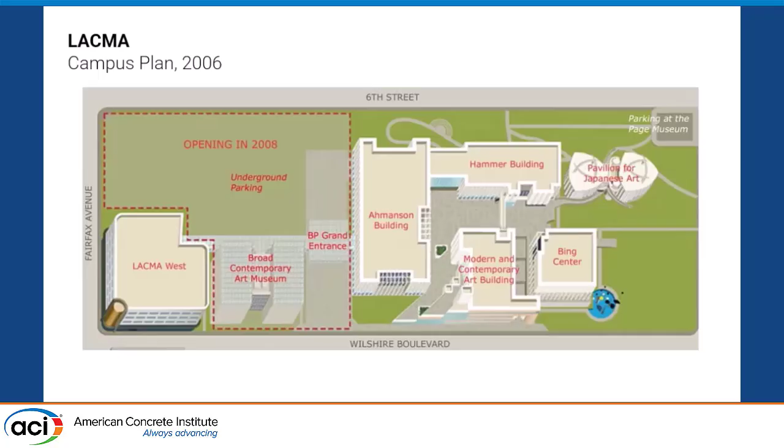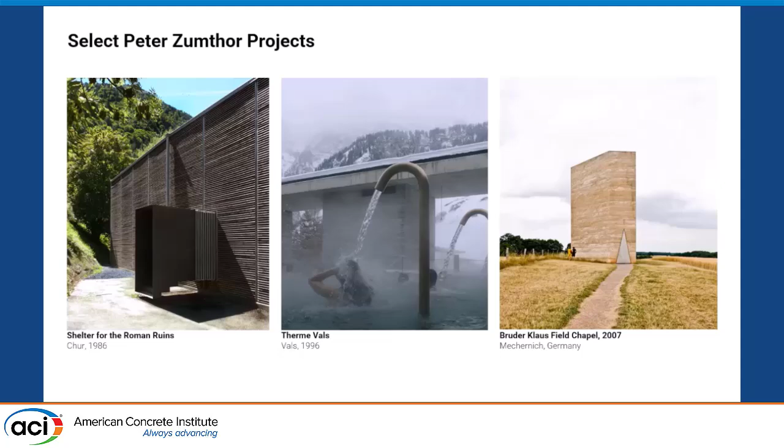The museum board went through a number of iterations with competitions to find the right architect for this building, and eventually landed on Peter Zumthor from Switzerland. He's a very known and respected architect, and a lot of his work is very atmospheric. He's interested in monolithic forms, concrete forms and materials. This project, LACMA, would be his first and largest project in the US.

This is a quite early model, and this is a physical model. Everything here is real—you can touch it with your hand, all the trees are actually physically modeled—and this sits in his studio in Switzerland.

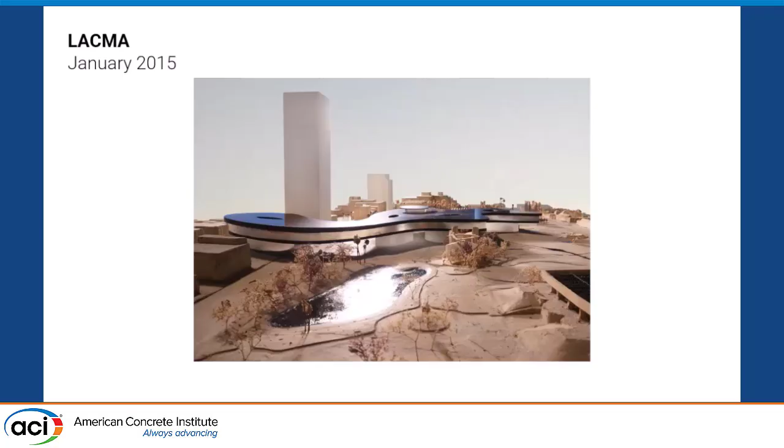You can see also from very early on, this concept of the organic shape was a very central theme. If you've been to LACMA, you know there's a tar pit next to the site—that's where ancient mammoth bones and stuff are found. I think part of the inspiration for the new LACMA was this very organic form; it stems from this tar pit. So there's a strong relationship between the building and the site.

Another important design concept for this museum is that all of the galleries are on one single plane. If you go to a lot of museums, you have galleries on several different floors—floor 2 for European art, floor 4 for Asian art. The idea for this museum is that all of these galleries are on the same plane, so there's an equal access that everyone has to these different types of art.

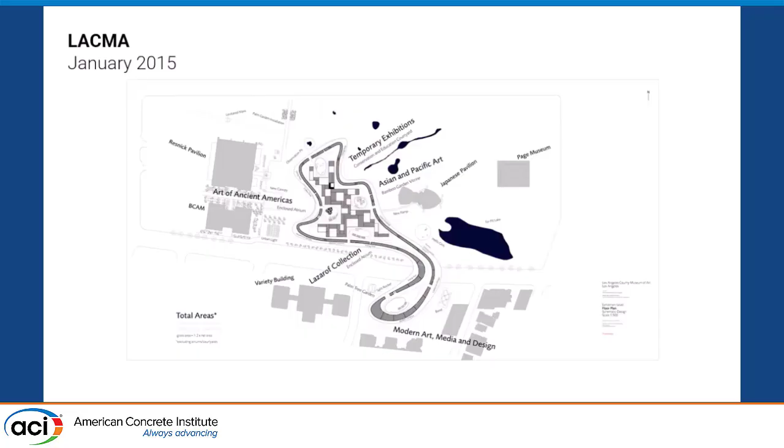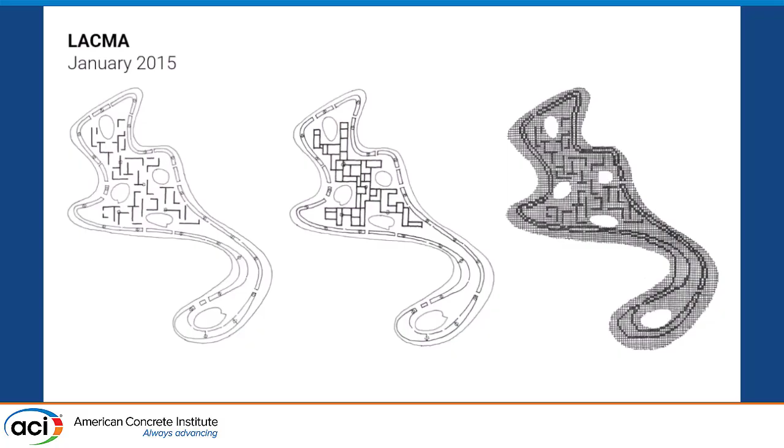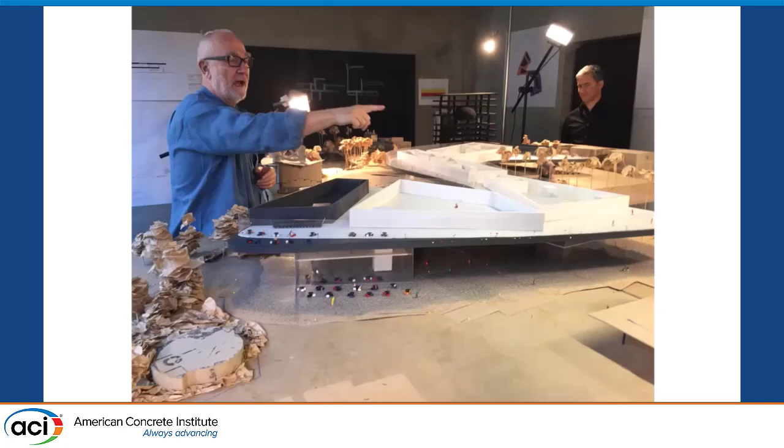This led to a very flat, large structure that, technically speaking, is only a 1-story building because there's only one floor that is the main exhibition floor. Some more diagrams show the interaction between the different gallery spaces, and the hierarchy is already starting to form along with the pathway between the different galleries. Another shot of Peter Zumthor in his studio, working through the physical models to imagine the space.

In 2016 we went through the initial phase of design development. This shows the concept—it's a bit different in a few slides—but the main concept forming was that there are these clusters of galleries.

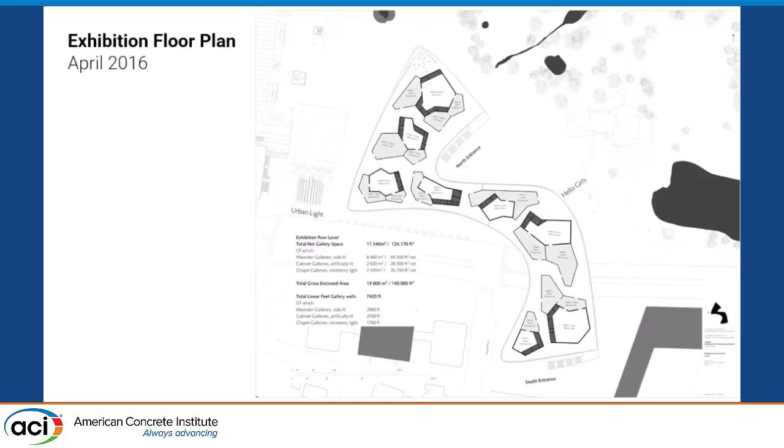So the white boxes are towers that go from the ground up, and then there are interconnecting galleries, the gray boxes that branch off from the towers but don't go to the ground. So there are floating galleries being suspended off of the ground.

So the exhibition and roof level are formed by top and bottom slabs. They end up being 8-inch slabs, with vertical ribs forming a waffle pattern hidden between the two slabs, ribs that are 4.5 to 9 feet tall. Those interstitial spaces between the slabs become your mechanical plenum and maintenance access spaces.

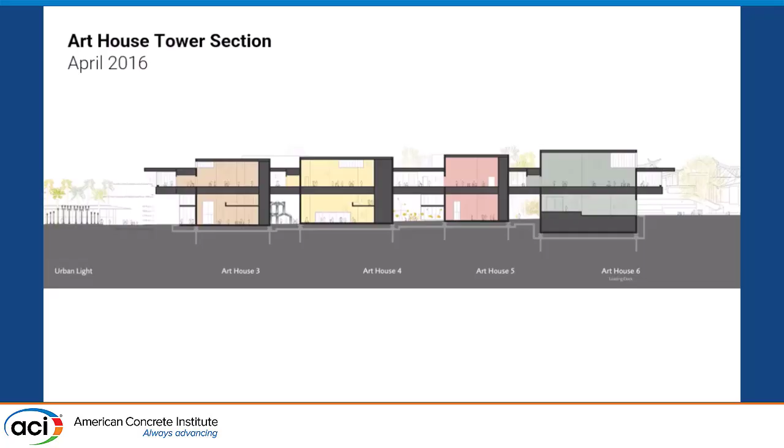Some early concepts: Peter Zumthor had really liked this organic flowing, meandering gallery idea, so we tried to take his idea and rationalize it based on real-world patterns you see. But we still ran into challenges of how do you make this actually constructible and repeatable.

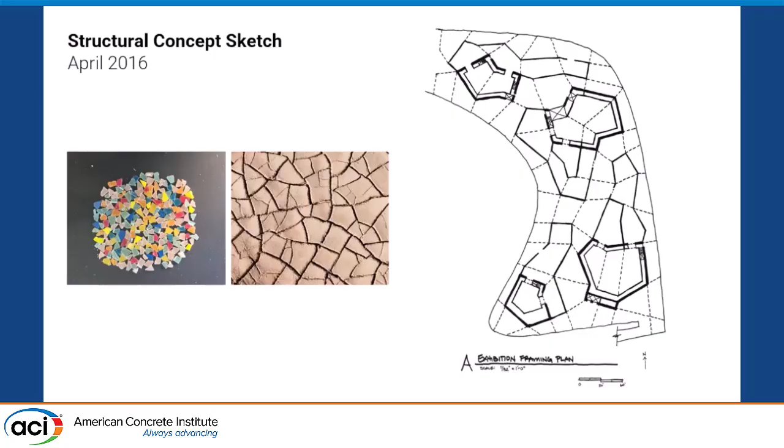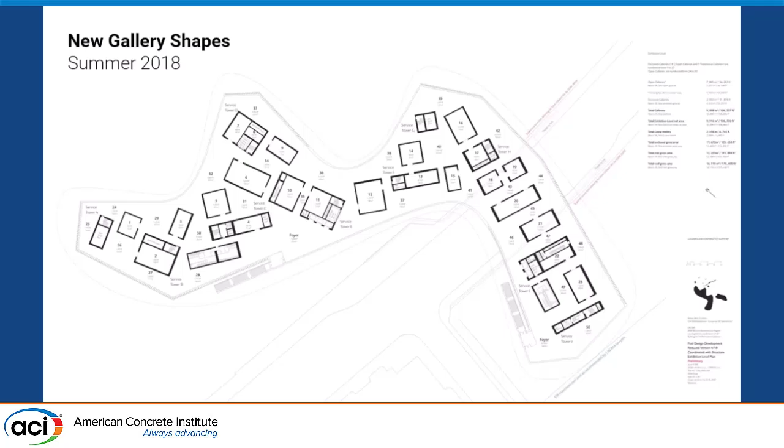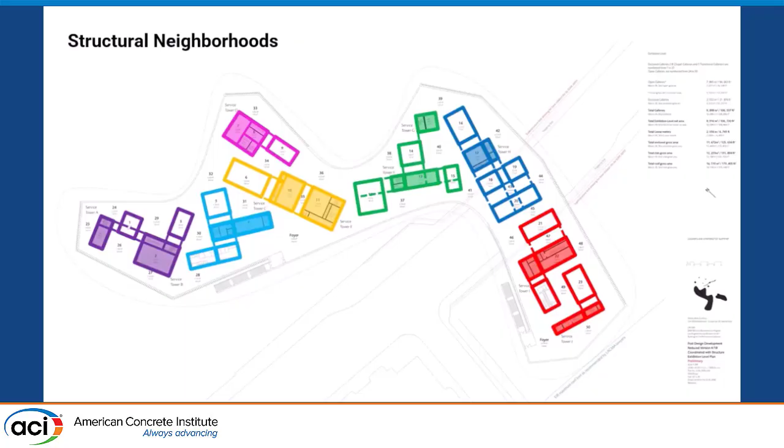So a few years later we went back to DD and developed a more rationalized layout of the plan. You can see the pairing I was talking about earlier: the towers that go all the way to the ground are the solid colors, and the galleries that hang from it are on the side, and in section that's what it would look like.

So the main thing that made this possible is to use PT. We have PT, I'll show you more about the hierarchy of the PT systems in the building, but one main concept we had very early on is to have PT tendons that link these floating galleries back to the towers.

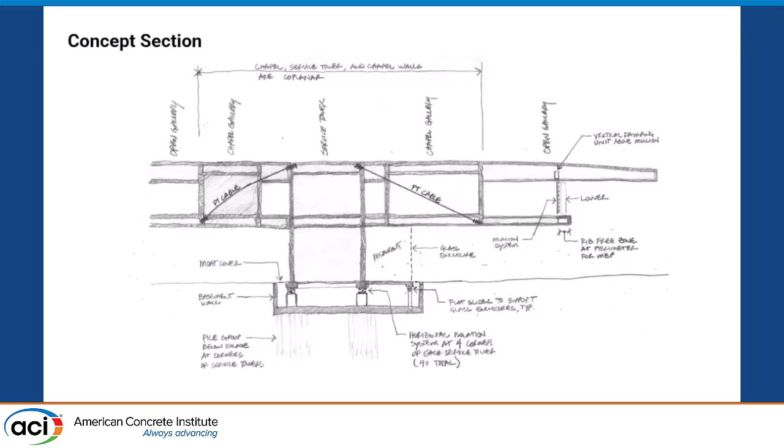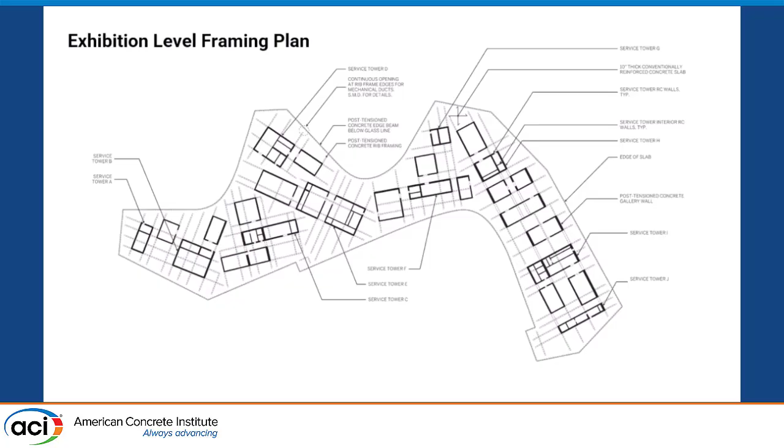This is showing us stepping through the rationalization. So even now we have an orthogonal grid, but they don't really relate to each other, and we wanted to come up with a consistent plan for the structure. So we tried to impose a rectangular grid. Didn't seem like it—we were trying to fit a square peg into a round hole situation.

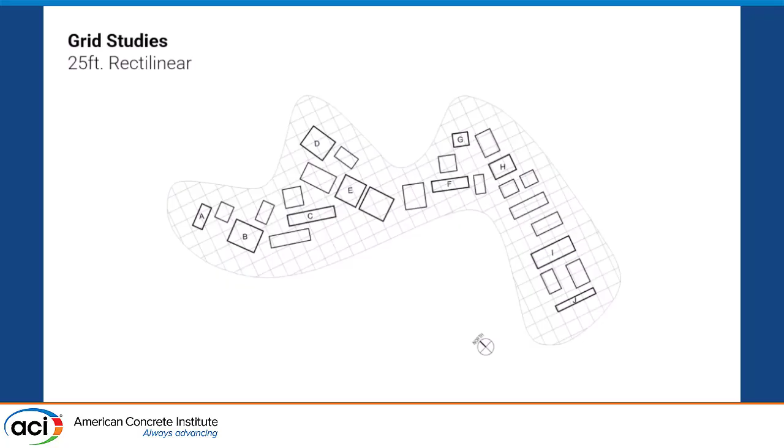So we thought, why don't we do a rhombus grid? Who says that things need to be orthogonal? Why don't we do 60-degree angles? This gave us the opportunity to use, instead of just 2 directions, 3 directions, maybe even a 4th one you can see on this side.

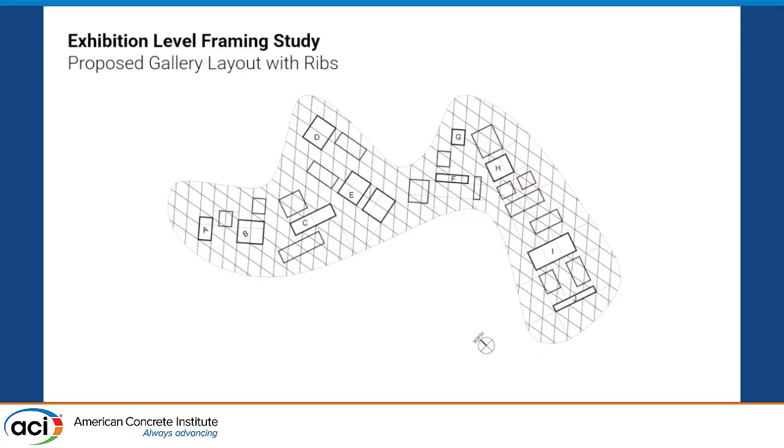So that gave us a good starting point for the structure and for the architecture. One thing I hadn't mentioned yet is that in this building, the structure is the architecture. Aside from a topping slab and the glass that wraps around the building, there are no other architectural finishes—no partition walls, no architectural ceiling. The structure is the architecture.

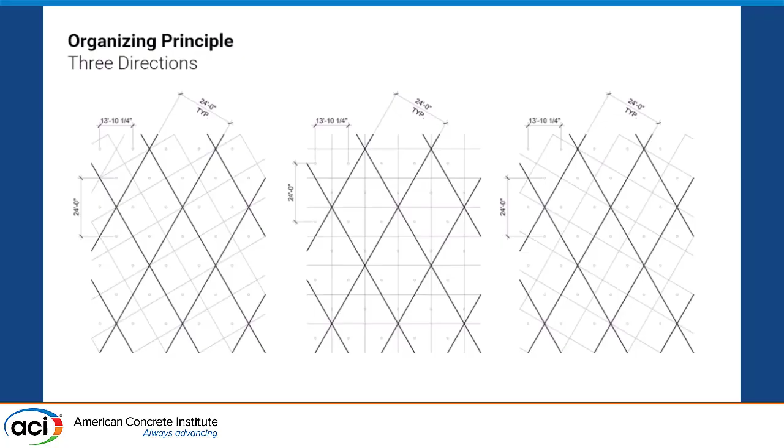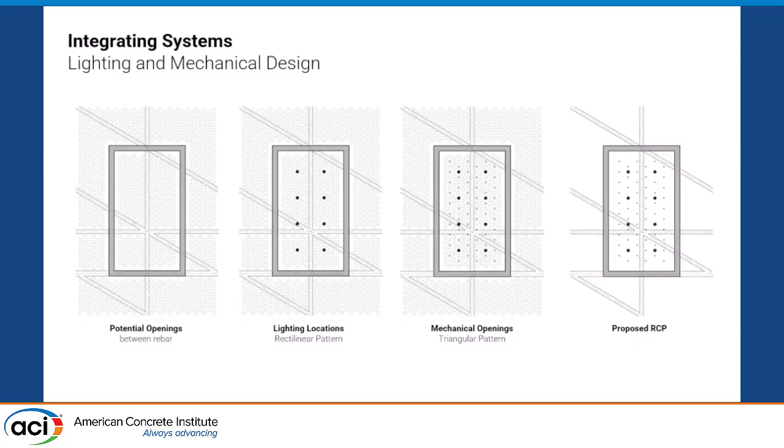So from very early on we had to work with our architects and our MEP engineers to lay out the systems in the project, figure out where the holes are that the lights will come through, where the holes are where return and supply air would feed the system, and lay that out onto our grid.

Additionally, we thought it would be really nice to express the rhomboidal grid, or the triangular grid. So we actually had special formwork that was triangle shaped, so that when you remove the formwork you can see the lines that reflect the grids.

The post-tensioning system—let's talk through the hierarchy of the PT. There's PT in the walls that go diagonally through. We also have PT in the vertical ribs, which are allowed to sweep up and down within the slab sandwiches. And then we also have PT in the top slabs to give that additional PT eccentricity.

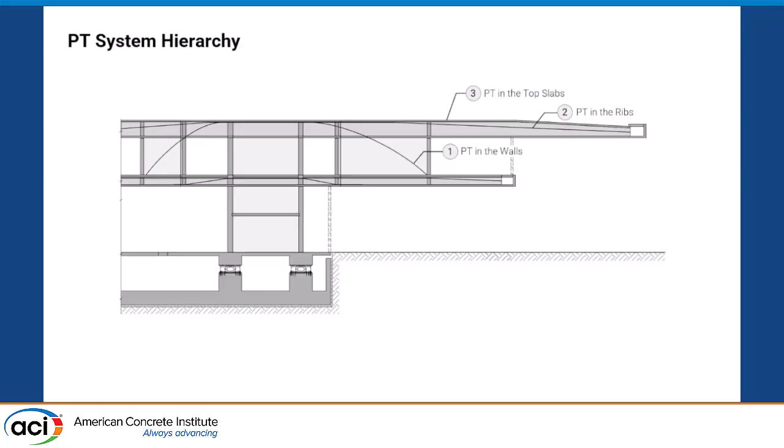Just to give you an idea of the plans, this is our PT—it follows the grid directions in both directions. When the PT is in the slab, you can't sweep it or change the eccentricity very much. So what we did was have PT that stresses from one side overlapping with PT that stresses from the other side, so that when they overlap in the middle, you get double the amount of PT. We're trying to control the amount of pre-compression by overlapping tendons and burying dead ends in the slabs.

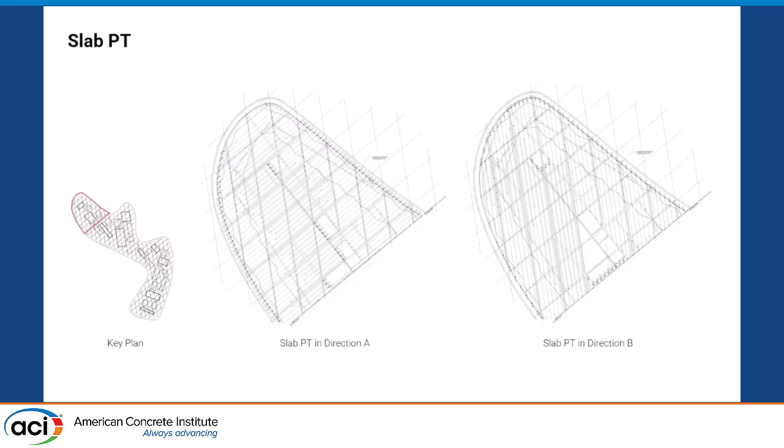In the rib design, here you can see an elevation across about 5 grid lines. There's not too much sweeping up and down here, but some of our grid lines are 15 bays long, and the PT starts diving all the way up and down the 9-foot rib.

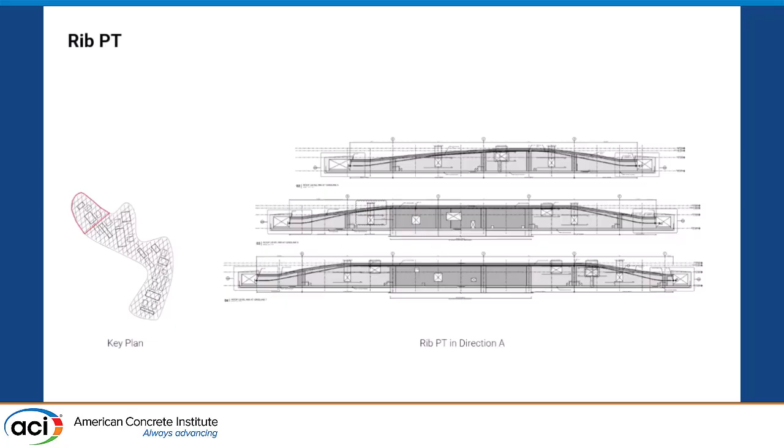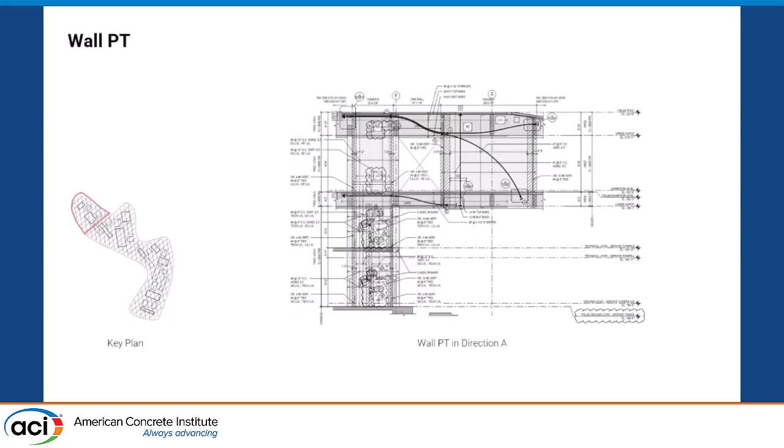In the walls, we have the diagonal PT coming down, because these walls are hanging and supporting the floor below. Without the PT, they would experience too much tension, so the PT really helped us with that aspect.

For modeling, we tested a bunch of software, did sensitivity analysis, and ended up with LUSAS—the London University Structural Analysis software. We really liked working with this software because it was able to handle our model, and we were able to model the PT just about anywhere we wanted it. There was no constraint like the PT must be tied to a certain floor or anything like that. So we really liked the freedom of the software.

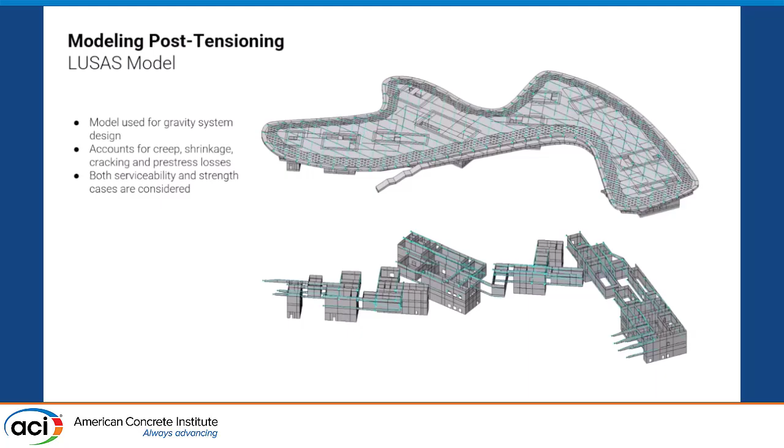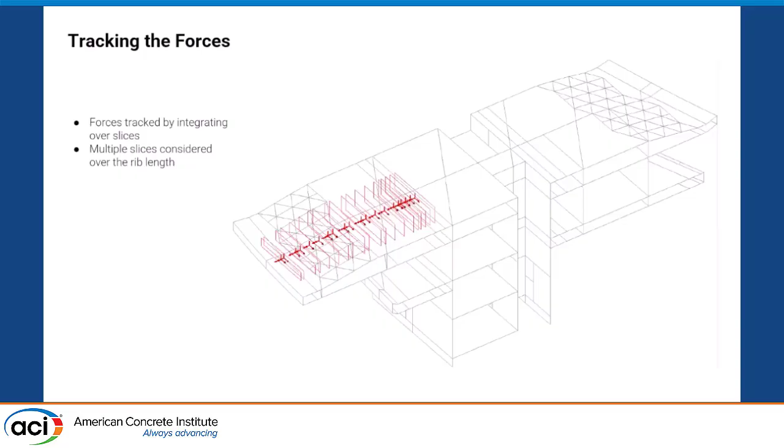We were also able to use it to account for creep, shrinkage, look at cracking, and all the PT losses from various codes—we checked AASHTO, Eurocode, and CEB, doing sensitivity analysis using these models to come up with our final methodology. We were able to slice the building along our grid lines to integrate forces and do strength checks, and of course we did deflection analysis—just some example contours here. There's much more math behind it, I promise.

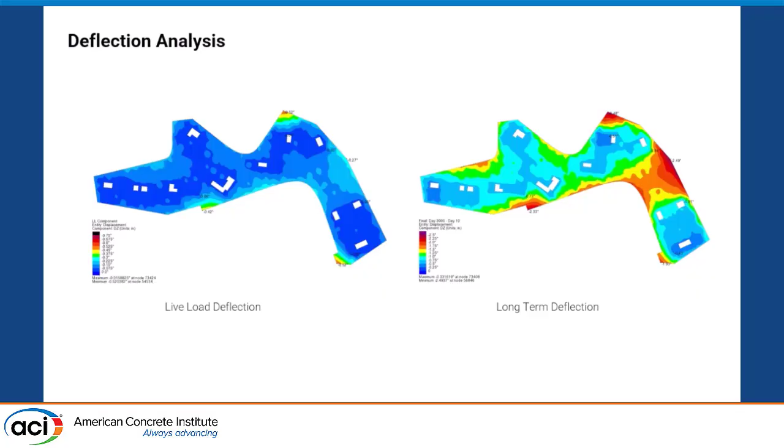We looked at live load deflection and long-term deflection. Long-term deflection was very important because, as I mentioned, there's glass that wraps all the way around the building, and this glass has very tight tolerances. We were looking at a quarter inch over 10 feet of slope in the long term. Also, the top and bottom—the roof sandwich and the exhibition sandwich—move independently, because with different span lengths and different loading, those two would move differentially. So we had to ensure we were working within a certain range of long-term relative deflection that the glass mullions can handle. We worked very closely with our facade engineers and contractor to make sure there were no issues there.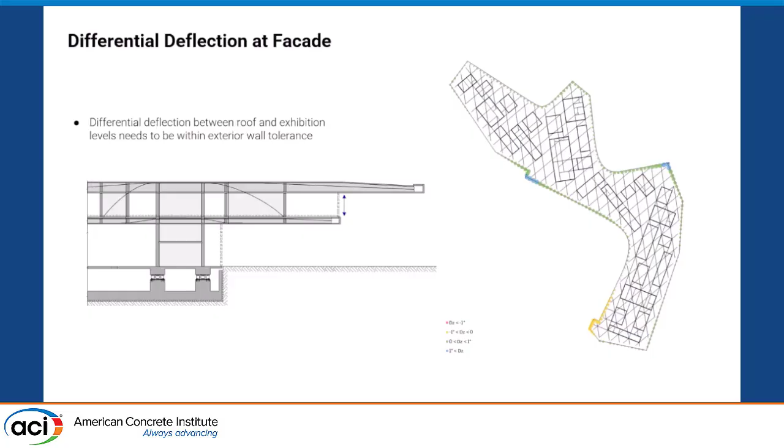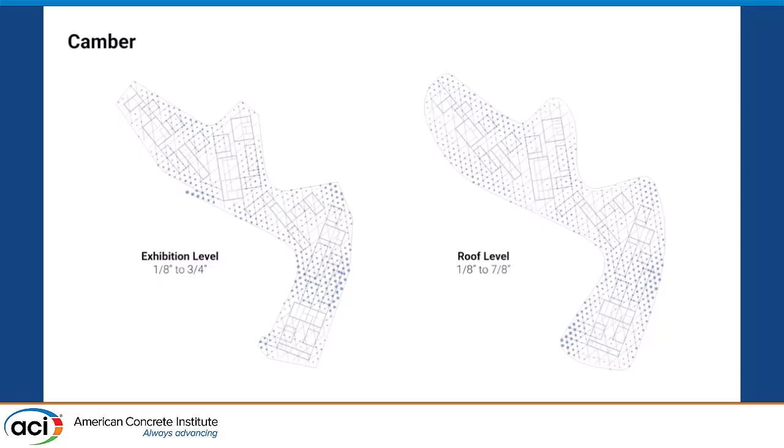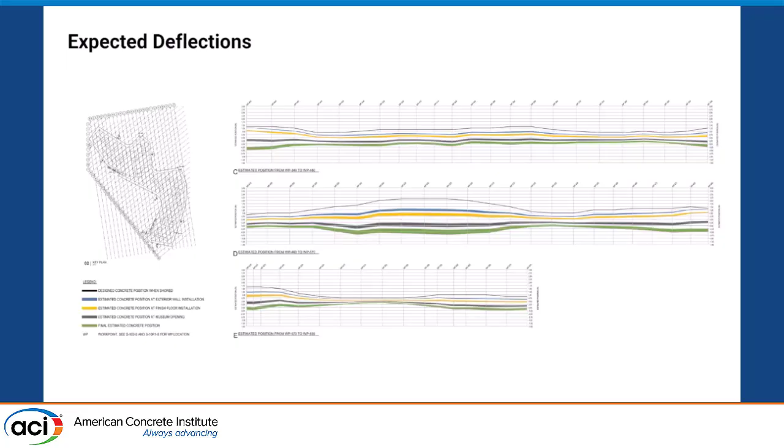We had camber diagrams with very detailed camber points across the building. Something we don't usually do, but figured was very important for this project, is that in our drawings we actually issued our expected deflections and expected position of the concrete at each stage of construction. At the top you have the camber value, then what we expect the concrete to be at when the glass comes in, where we expect it when the finished floor comes in, where it is on the day of opening—projected a couple years after construction, after the first pour—and then in about 5 years. There are ranges because we had to account for uncertainty, and we used language like 'this is the estimated deflection.' We don't know for certain where it will end up, but this is close, very close.

So there are some other aspects that I haven't touched on yet. I've talked a lot about gravity, but since this project is in LA, there is high seismicity. There are so many faults, high seismicity, you all know that.

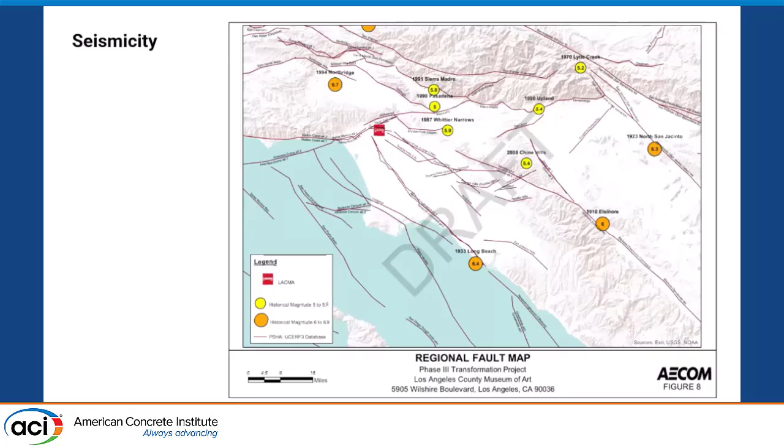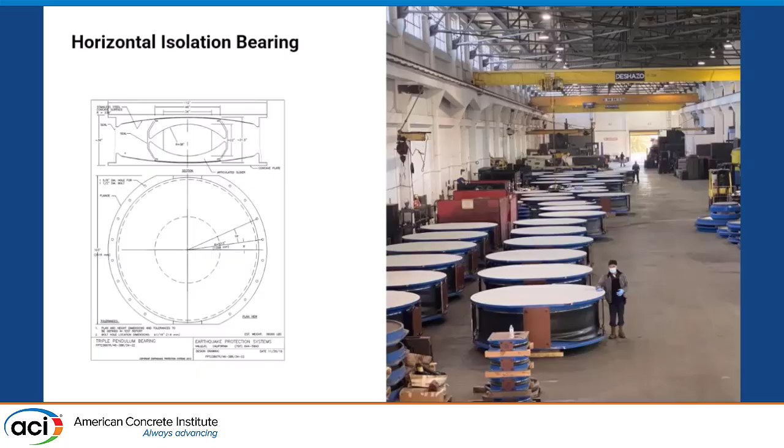So for our building, we actually had horizontal isolation bearings. I mentioned there are towers that go down to the ground. We have 10 of them, 10 rectangular towers, and each has 4 triple friction pendulum bearings under the towers. These are massive, as you can see. In addition to horizontal movement, the bearings are used for that too.

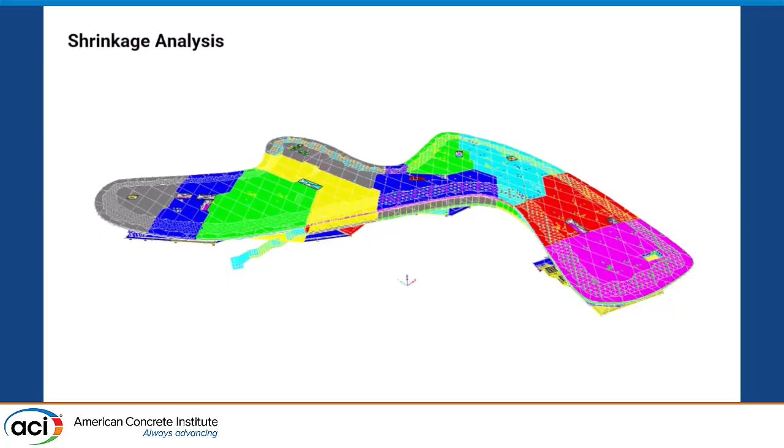This building doesn't have any expansion joints. We had pour strips, pour zones, pour sequencing horizontally, but there are no joints in the permanent condition, and the whole building moves together. We had to do a shrinkage analysis, but we were able to utilize the horizontal isolators to help mitigate stresses induced during the shrinkage phase.

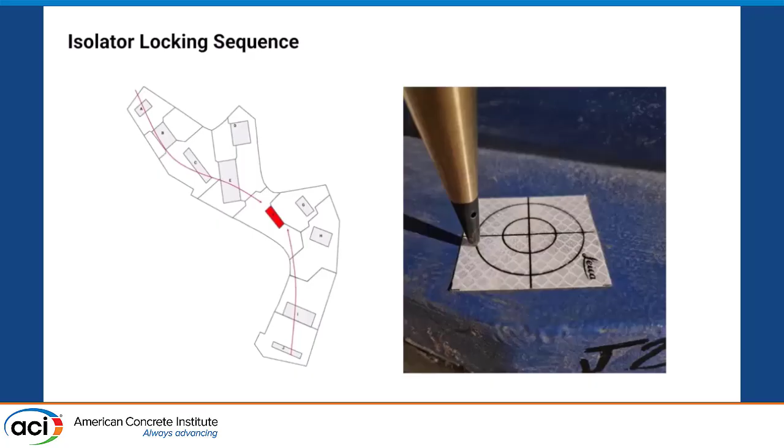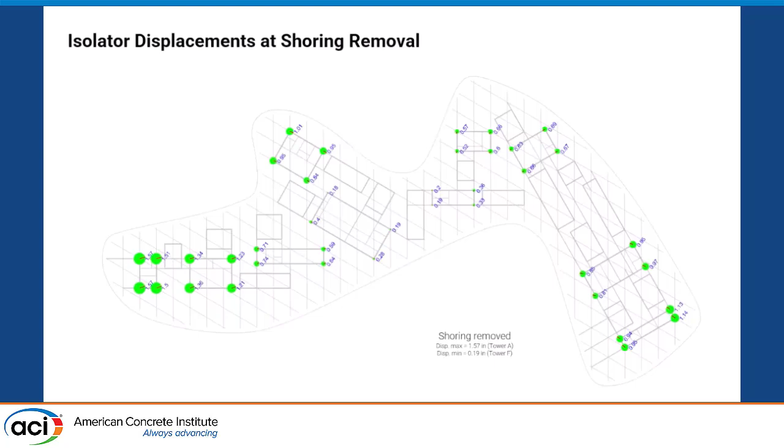So we studied isolator locking and unlocking sequences to mitigate that. You can see this is a real picture of one of the isolators, the top moving relative to the bottom during the shrinkage phase. Just to illustrate the movements at the two ends of the building, we're looking at about 1.5 inches from this specific study. Not too much, but it does help a lot to have that movement.

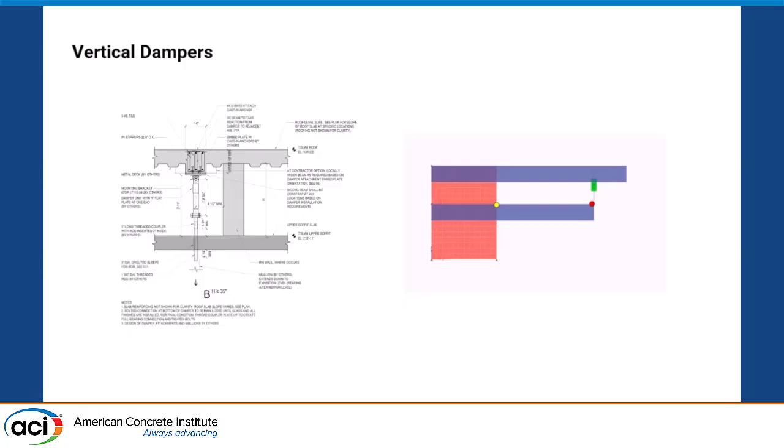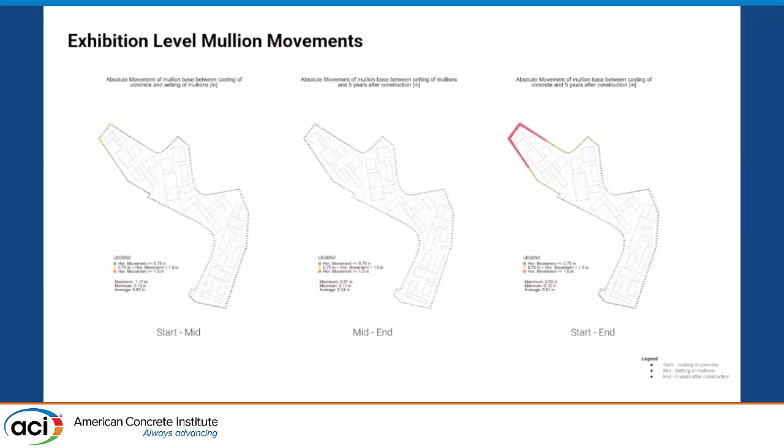In addition to horizontal seismic, there's vertical seismic. I won't talk too much about it because we're here about long-term deflections. But another consideration we had was that these cantilevers were flapping in the vertical seismic condition. So we had vertical dampers at the mullion locations to control those movements at the tip. I'm mentioning that so we know we considered the vertical seismic movement in addition to the long-term gravity movement, and they had to be added together in consideration with the facade system.

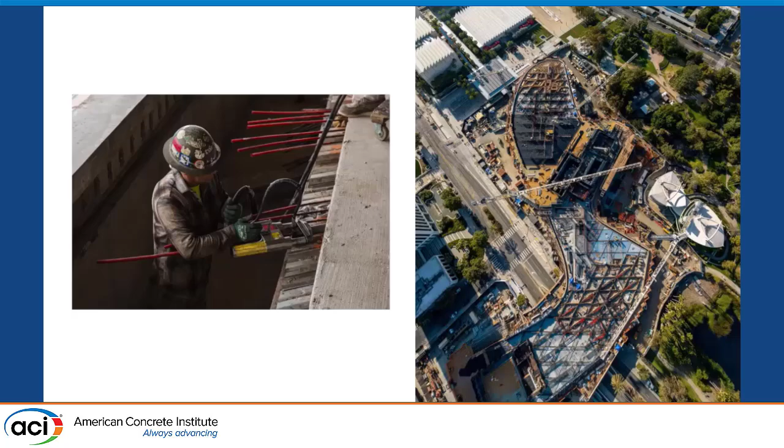So for the last part, now we're just going to look at some construction sequence and photos. As we said, it's a very long building, so not just the vertical sequence was important, the horizontal sequence was also very important. Vertically, we have kind of what you'd expect: build the concrete up to the top and then stress from the top to the bottom. And then horizontally, moving from one end of the building to the other end.

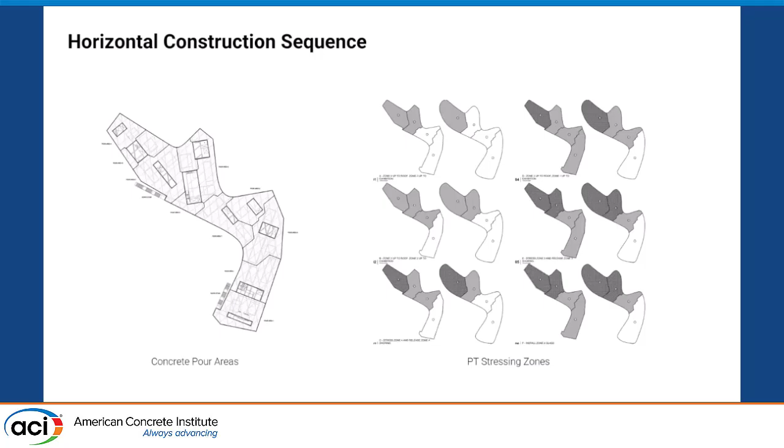One thing to mention here is that the age of the concrete, we had to consider that carefully because of the combination of the vertical and horizontal sequence. Some of the lower slab of the exhibition level, the formwork was not pulled until a year after it had been poured. And then the PT was not stressed until several months or more after they were poured. So we had to make sure we considered the age of the concrete correctly in our analysis.

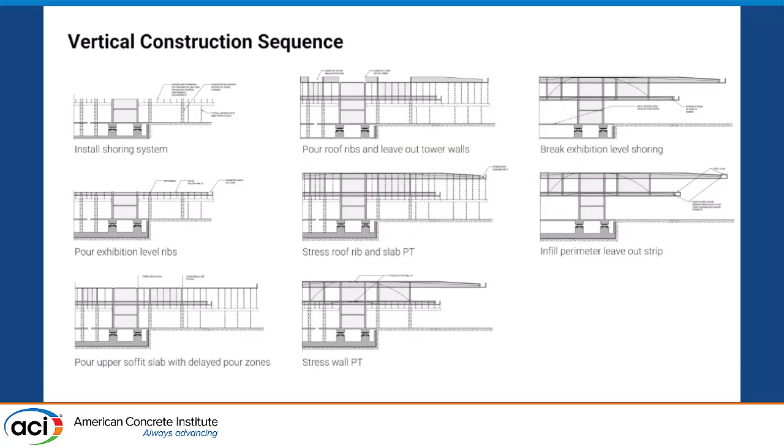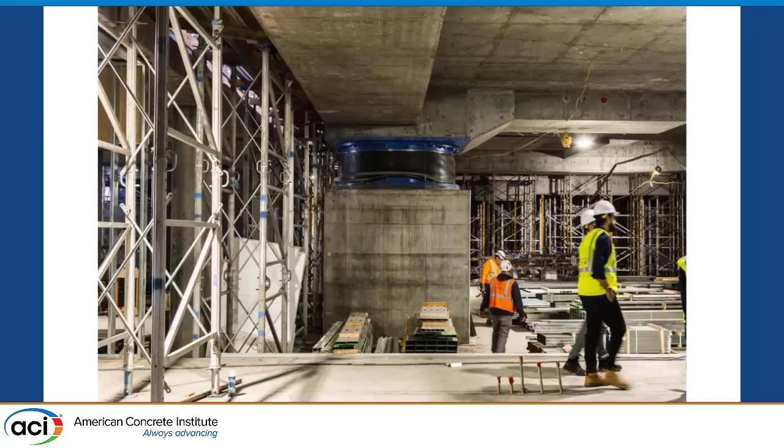I'll just run through some construction photos to round out the presentation. This is the isolator within the basement. We had to build a 5-foot moat for the seismic movement.

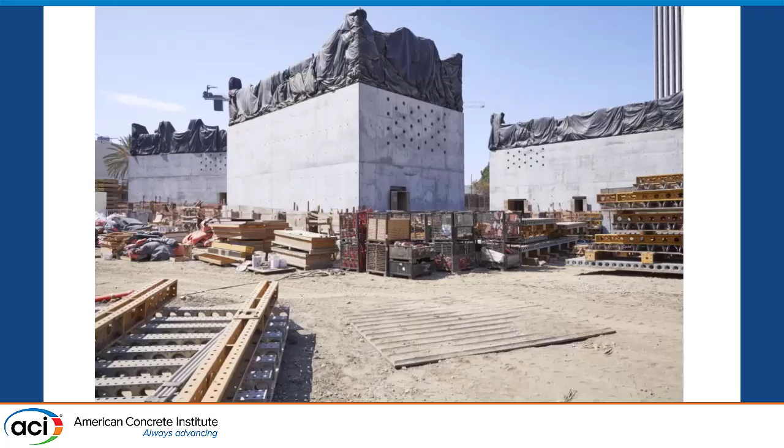Putting up formwork for the walls. This is the towers that are poured and stripped.

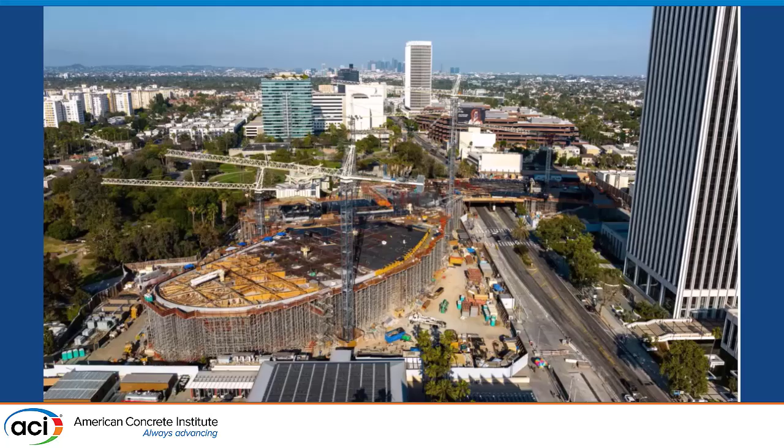I'm skipping ahead a little bit. Now you can see this is the roof slab being constructed. On the very far end, there's formwork for the ribs. In the middle, there's rebar getting put up. And then there's a portion that's black formwork - that's the top of the formwork for the underside of the roof slab.

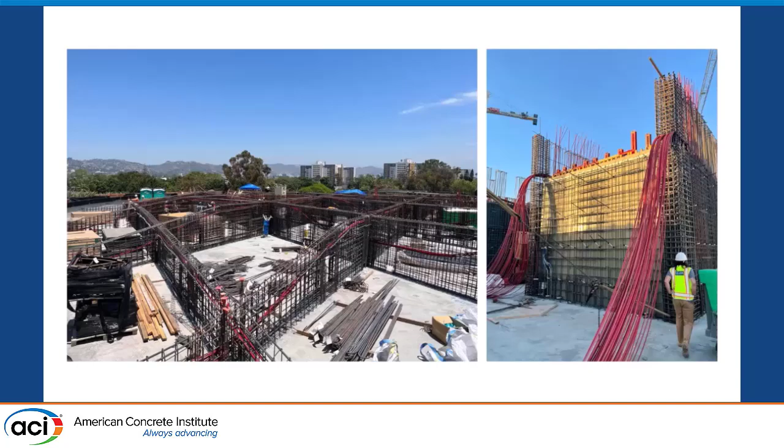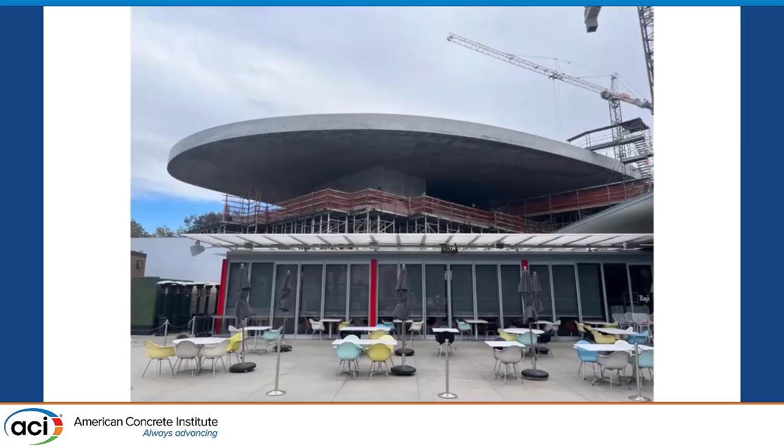A bit closer, here we have the vertical ribs at the sloped roof portion. You have the rebar in, the PT getting threaded through, lots of PT in the walls getting threaded through. Stripping of the roof shoring. You can finally see the length of the cantilever there.